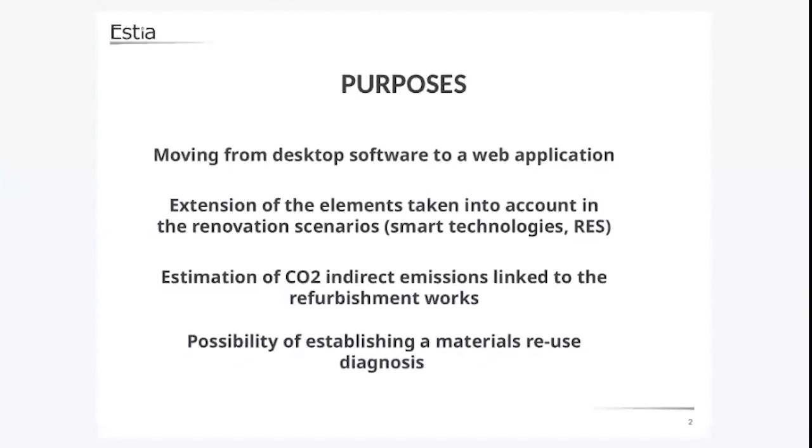As part of the PRELUDE project, the EPIQR desktop tool moved to a web platform, allowing anyone to easily diagnose a building renovation with reliable costs from anywhere. Also through the PRELUDE project, new elements with their relative costs have been added to the method to take into account smart technologies, energy optimization actions, and renewable energy sources. Finally, to help the residential building stock fit CO2 reduction targets, the new version also includes the CO2 indirect emissions of each refurbishment action.

This EPIQR Eco method will, after finishing its implementation, also be able to take into account reuse materials scenarios.

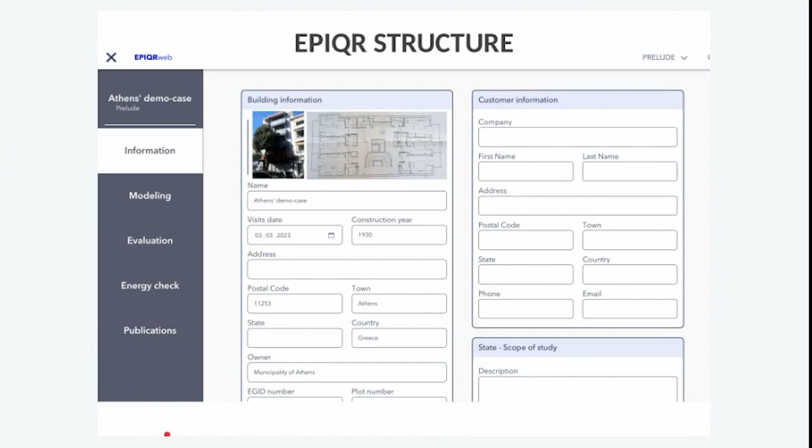The first step of a building diagnosis is the completion of building information in the first tab. Contact details for both the building and the owner can be filled in, as well as visual building information like pictures or plans, as we can see in this capture.

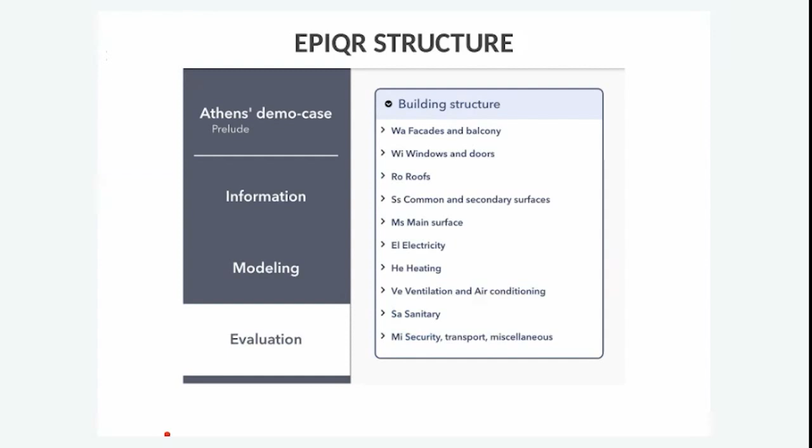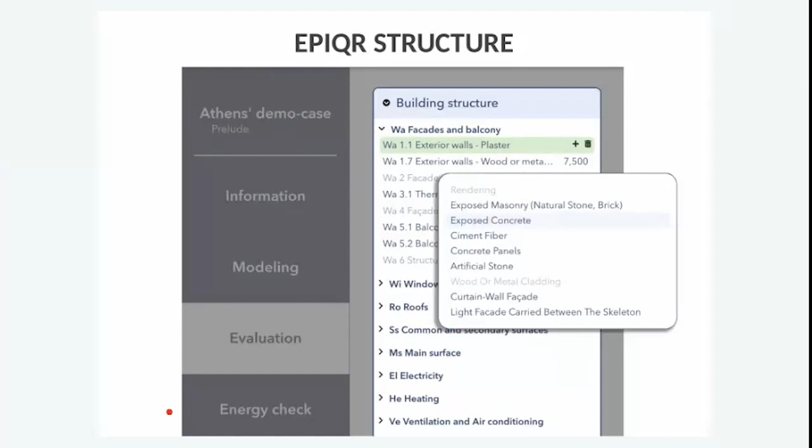In the evaluation tab, the whole EPIQR structure and coding principle defined by the method is summarized. The building is first decomposed into 10 macro elements, which are either architectural, for the first ones, or technical, for the last ones. Then, by clicking on a specific macro element, here the facade and balcony, its component parts or elements appear. The plus sign adds the item to the diagnosis, and the light color elements have not been added yet. For example, the facade decorations is not being diagnosed for now, with no cost associated.

Similarly, by clicking on a specific element within a macro element, its component parts or types appear. So here, for the exterior walls in plaster, we can have different renderings listed. Each element type can be diagnosed through the selection of two criteria.

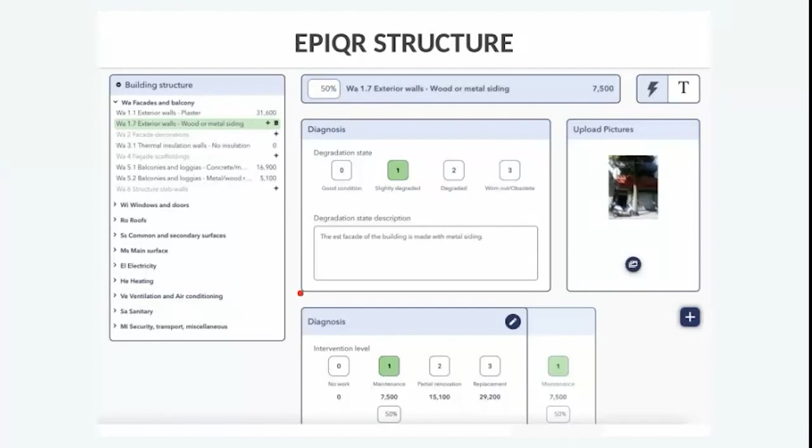The first criterion is the degradation degree, and the second is the intervention level. The degradation degree qualifies the element's current state, and pictures can be added on the right to remember it. The intervention level qualifies the work to be done to this element, ranging from 0 for no work to 3 for complete replacement. We can also add a ratio to each element to adapt them to the project reality—for example, if you have different types of facades, you would add each of them here. Then, by clicking on the cost below, the selected intervention level shows a cost breakdown with work details.

The unitary cost of the relative quantity here are detailed and help to understand which specific interventions are taken into account in the total costs. So the total cost here, it's the 8,000. And if needed, again, a ratio can also be applied to the total cost. So the ratio that we see here, the 50%, can be changed.

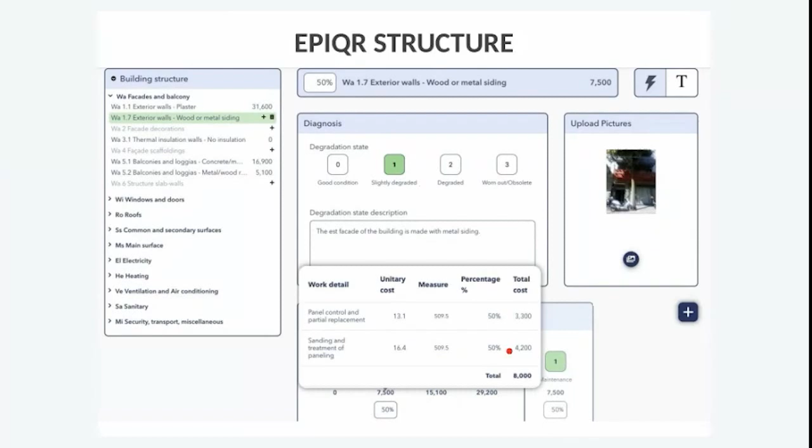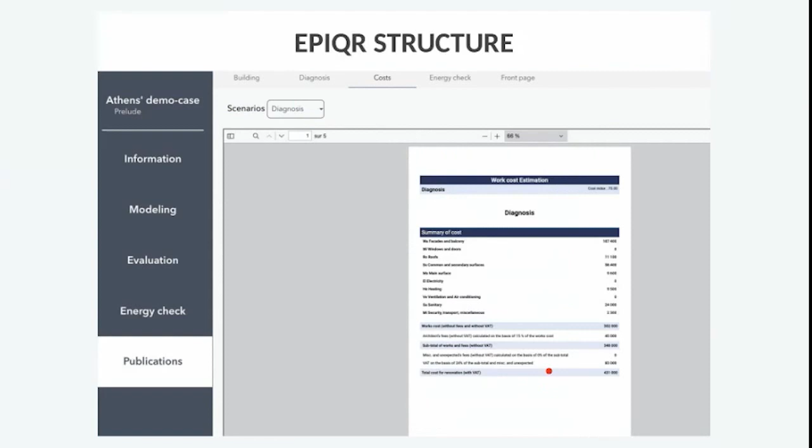And several renovation scenarios can also be added by clicking here on the right corner of the intervention level tab. And also for some element type, improvement or adaptation work can also be selected. Here, for example, you have the possibility to transform the facade into a ventilated one and adapt the cost of it.

And then in the last tab, the publications one, you have the result for each cost scenario and for the overall diagnosis that are available in the form of reports. And still within the PRELUDE project, about 10 smart technologies or optimization actions with their relative cost have been added to the database. Most of these new elements are located in the technical macro elements, such as here you can see electricity, or just below the heating one.

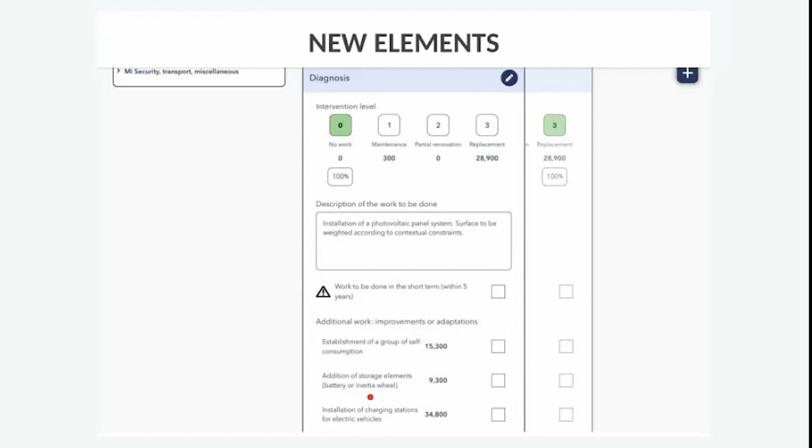To list a few, the addition of a storage element that you can see here with its relative costs, like a battery, or the installation of charging stations for electric vehicles, can now be linked to the photovoltaic installation and added to the total cost of the diagnosis. And similarly, optimization energy contracts, as well as the installation of energy meters, are now available in the database.

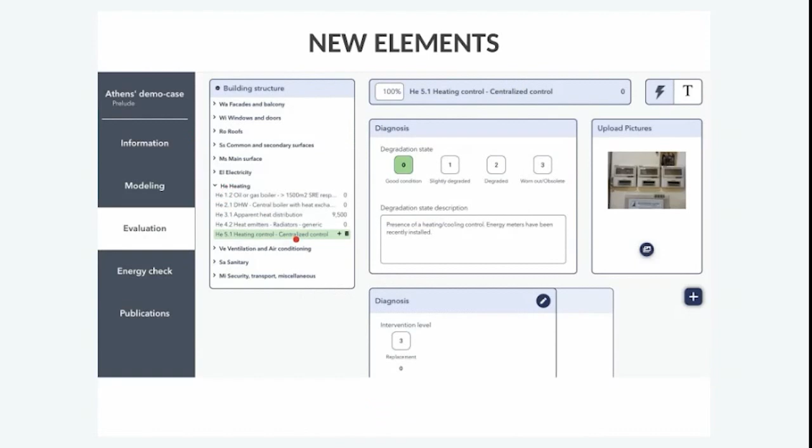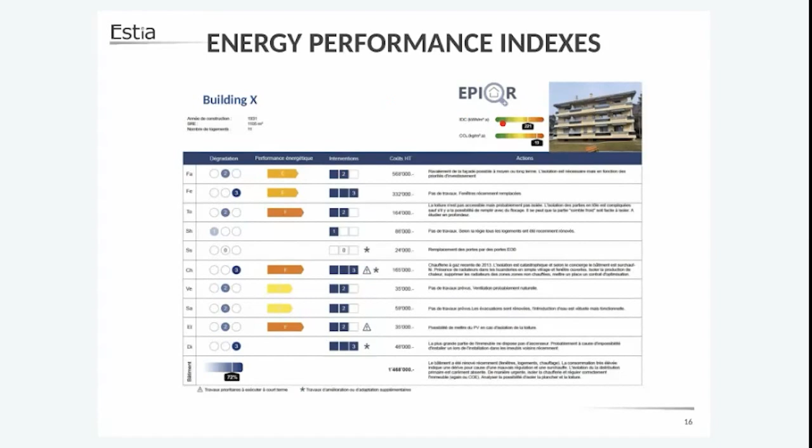So here it is for the heating macro, where you can see that you can add implementation of energy optimization contracts, etc. In addition to costs, several energy performance parameters can be entered into the platform, such as the energy efficiency class of each macro element that we can see here, in different colors and length, depending on the quality of the element. Or, for example, the heat consumption index, which here comes from the actual building consumption.

The latest software update, but not the least, is the calculation of the indirect CO2 emissions of each renovation work, named EPIQR plus CO2. So these results are derived directly from the diagnosis coding. No extra time is needed, and they are presented in the same form as cost results. So here we can see this is the actual state of the building. And for the first scenario of renovation, you have the cost and below the CO2 indirect emission of each intervention. This is the second scenario here.

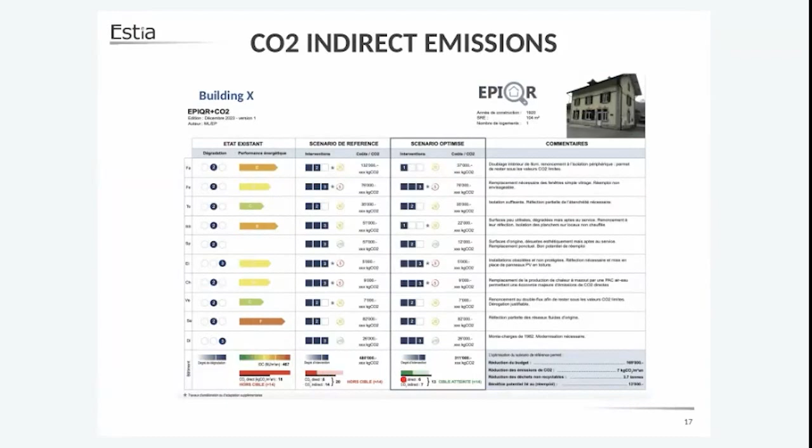And they permit to compare different renovation scenarios between them with another criteria, so not only the cost. And they also permit to compare them with the energetic standards of the country. So the energetic standards values are at the end here, and you can see if we are on the green side or the red side of this standard. The calculation of the direct CO2 emissions of a specific renovation is actually under development on this platform, as well as the version for all building affectations. For now, it is only for houses, I would say.

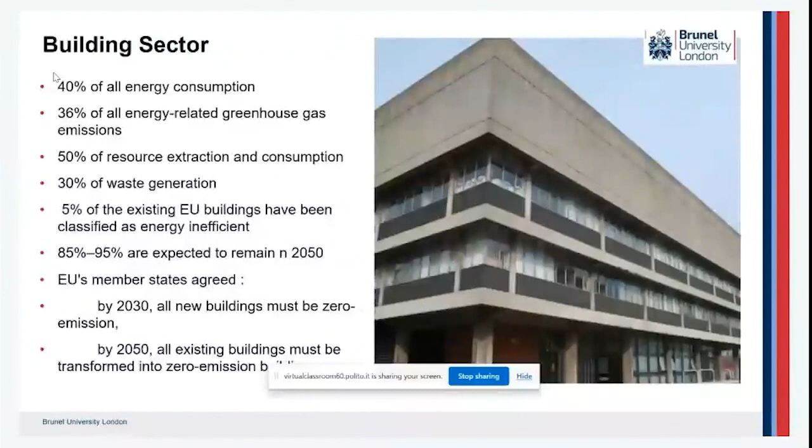As a result of that, the European Union member states agreed that by 2030, all new buildings must be zero emission buildings, and by 2050, all existing buildings must be transformed into zero emission buildings. So one of the ways of improving the environmental impact of the buildings is to retrofit the buildings.

For that reason, there are lots of different measures that have been taken to reduce the environmental impact of the buildings. We are familiar with, for instance, improving the insulation, the ceiling, the roofs and floors of the buildings, to reduce the heat transfer and loss of heat in the buildings, and also different types of sealing of the gaps and cracks. Installation of green roofs and walls is also something that has been considered.

Replacement of the windows and doors with more efficient ones. Using energy efficient lighting, for instance, replacing the bulbs with energy efficient LEDs, or installing sensors to control the lighting system during occupancy. Another thing is upgrading the HVAC system, the ventilation and air conditioning system, making them much more highly efficient,

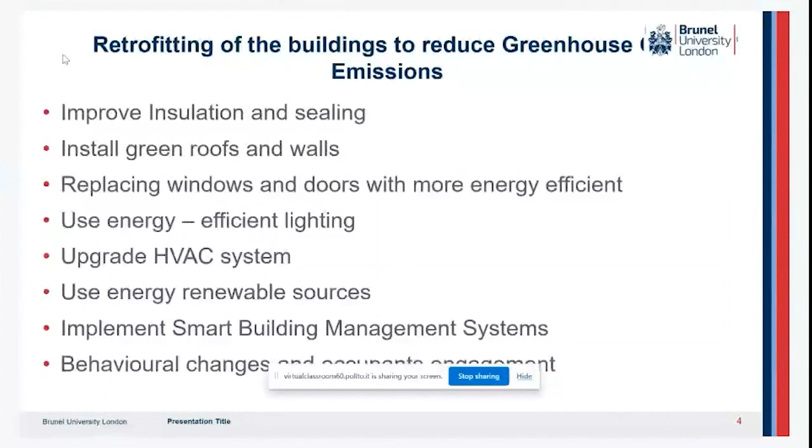But retrofitting of the buildings is not always easy to implement, and very often we are facing different types of issues, and those issues could be related, for instance, to cost considerations. The retrofitting could be expensive, and there is also some hesitation by the owners about investing in these energy inefficient buildings. And also the costs that are involved, for instance, the cost of the materials, could cause lots of issues.

Another thing is technical challenges, especially if we have older buildings. That's also something that needs to be considered, because not all buildings, new or old, are the same. They need different types of approach. There could be some regulatory barriers as well when it comes to implementing retrofitting measures and energy efficient technologies.

And that also depends on the place where the buildings are based. Even different countries in the European Union have different approaches to how they're dealing with improvement of the energy efficiency of the buildings. There could also be a lack of incentives. Some regions have more financial incentives, some regions have less, or some countries have more or less.

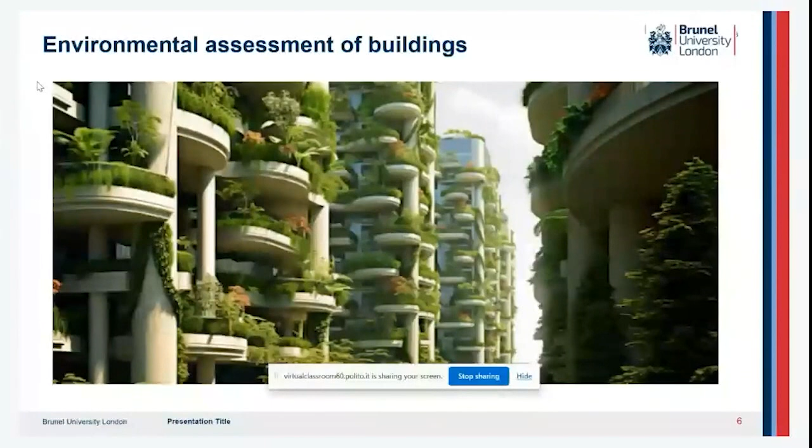When we talk about environmental assessment of the buildings, I would like to introduce a life cycle assessment framework, which involves three different stages: goal and scope definition, inventory analysis, and impact assessment. This is a standard life cycle assessment that could be used for industrial processes, for assessing the environmental impact of different products and processes, but it also applies to buildings.

For instance, if we use life cycle assessment to compare before and after retrofitting, how sustainable they are, we need to set that up at the very beginning. Or we can maybe make some comparison between buildings. That's also set up in the goal and scope definition. And also functional units, which are very important in terms of buildings, and must be set up at the very beginning.

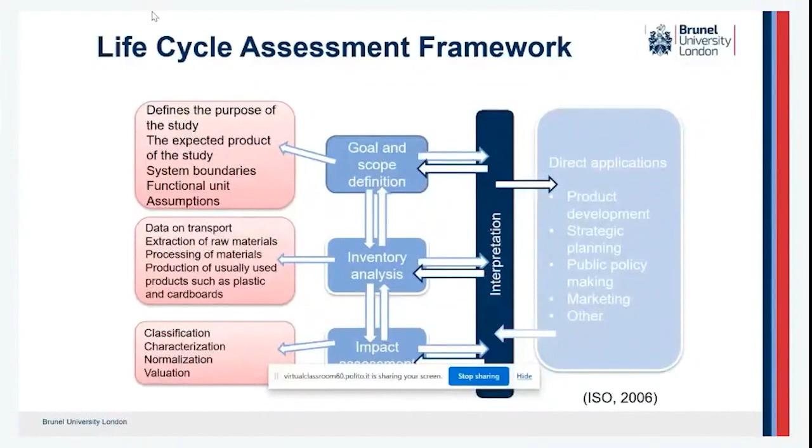So to how many buildings can we apply all these system boundaries including end of life? Probably few of them, because old buildings are normally retrofitted or improved, and we are focusing more on assessing the environmental impact of live buildings, the buildings that are in use.

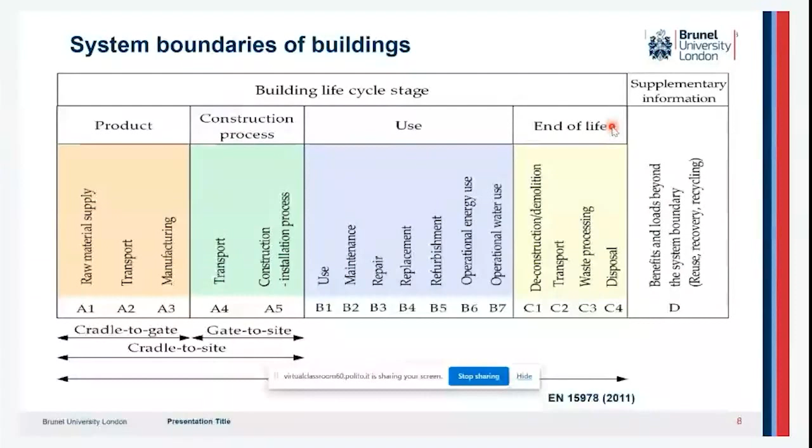In terms of the system boundaries of buildings, we mentioned the collection of the data, which is part of the inventory analysis that we mentioned in the previous slide. After that, we are thinking about how to use the data, how to analyze it in order to do the environmental assessment.

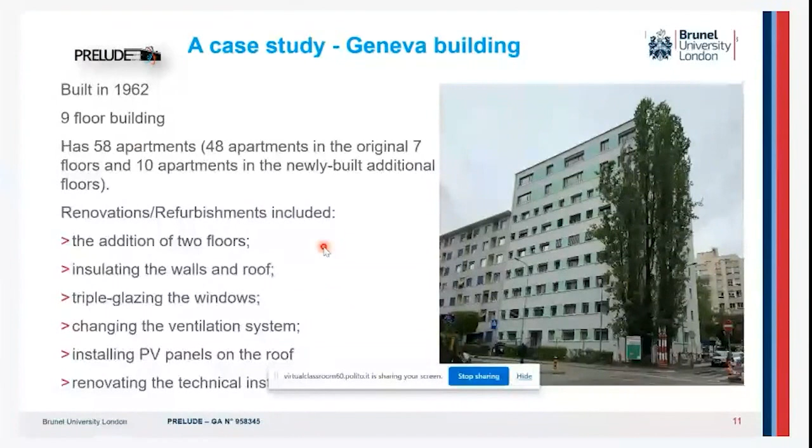So we were using life cycle assessment for this building, and the first thing was the goal and scope of the study. The goal of the study was to carry out a life cycle assessment on this building and estimate the environmental impact based on the energy consumption of heating and domestic hot water before and after the renovation.

The scope of this study was to specify a functional unit, for which we took into account the amount of energy that has been used, and energy sources, input energy and output energy. For input energy, we took into account the sources of the energy in the before and after scenarios.

As a part of the refurbishment process, a total of 150 sensors were placed in the building, primarily in the last 2 floors, monitoring the temperature, pressure, electric consumption, electric flow, status of the gas burner, heat pump, and gas counter. These 10 sensors were placed in the apartments in the last 2 floors, one in each apartment, monitoring the energy consumption.

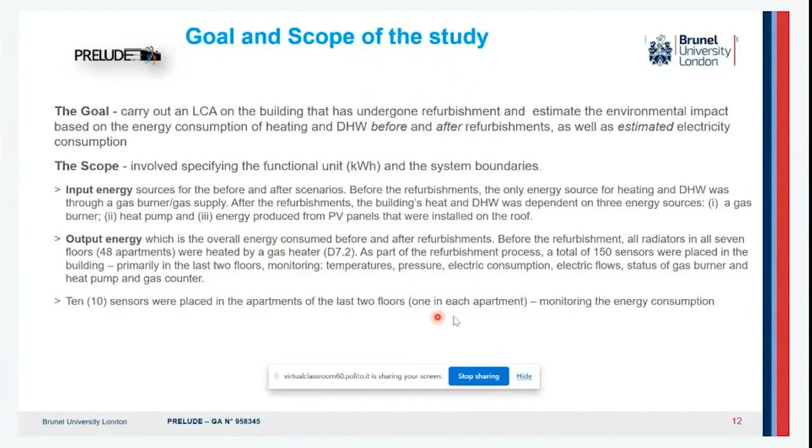And we can see now the system boundaries of the building before and after refurbishment. I would like to emphasize that we considered the life cycle assessment on the usage phase of the building, because the building is used, and we can see the system boundaries before refurbishment, what kind of energy sources have been taken into account, and after refurbishment, the usage phase before and after the renovation of the building.

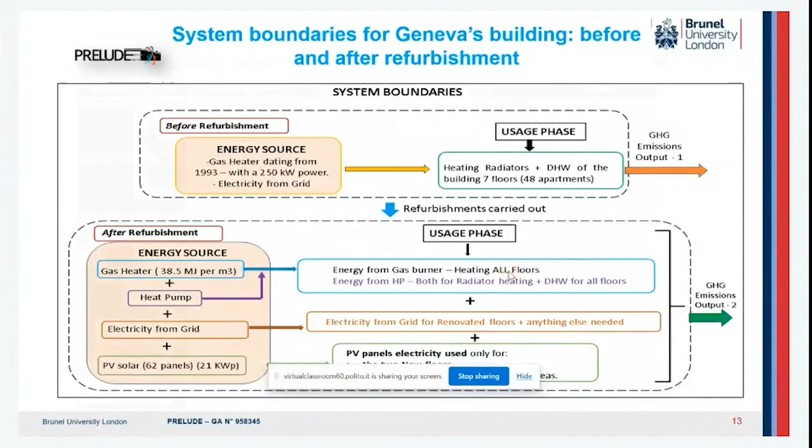And a number of data and also the historic data have been received from the partners. This is something which comes from the PRELUDE partner, and we considered before refurbishment.

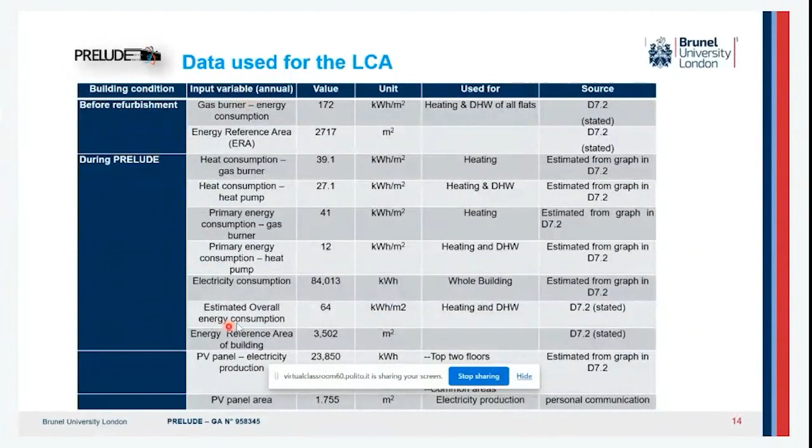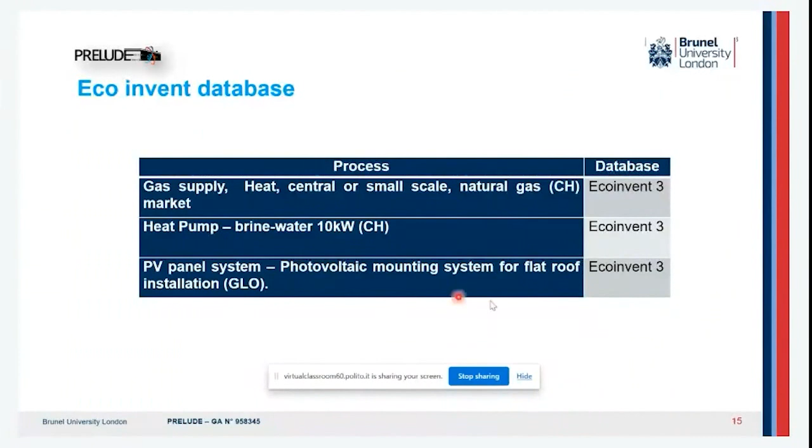You can see the values that we considered, and you can see all these input variables that I have already mentioned: value of the buildings, unit, and for what they were using. And also the EcoInvent database has been used. We were using EcoInvent 3, we were using SimaPro, and we considered this for the gas supply, central heat or small scale natural gas, heat pump, and PV panel system. We have been using the database from EcoInvent 3.

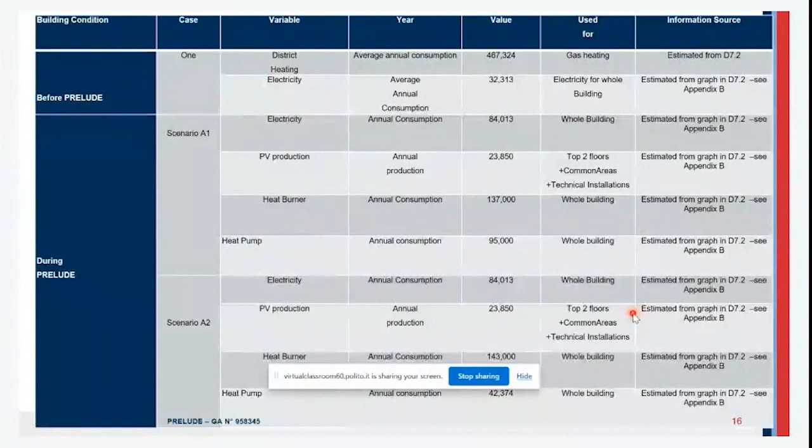And in the next slide, we can see more data like variables before PRELUDE and during PRELUDE or after the PRELUDE project. And again, we had 3 different scenarios which came before PRELUDE and during PRELUDE. Annual production of the power for each renewable system is given in this table. So we were more focused on the retrofitting of the building, but taking into account the use of the renewable energy.

So we can see some of the data about characterization results of this building. This data comes from SimaPro simulation, and we can see there are 13 categories that have been taken into account, and you can see all of them. I hope you can see it here, there is one part which says before refurbishment, scenario A1 and A2.

And there was a difference found between before and after refurbishment of the building, and the largest reduction of global warming and ozone formation, and also fossil fuel resources, was seen at scenario A2. It was also interesting to see that the impact of ecotoxicity categories from 7 to 12 was greater after refurbishment conditions. And this is probably related with the utilization of the PV panels and also the heat pumps.

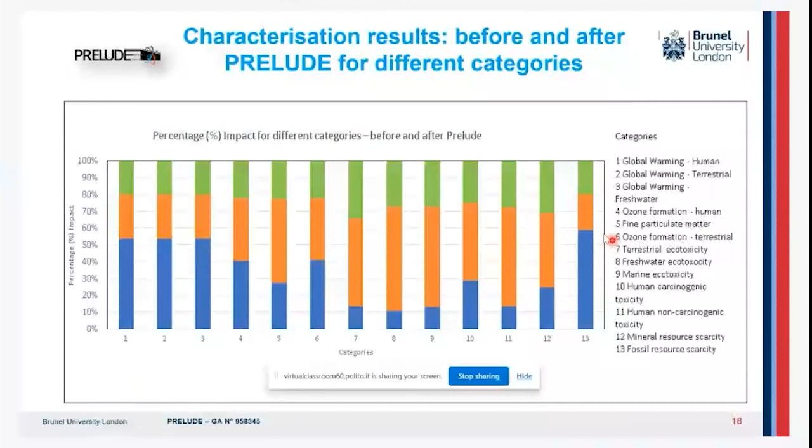The next slide shows the damage assessment. This was similar to the figure shown before. 3 aspects were considered: human health, ecosystem, and resources. And it was interesting to see the reduced damage impact of the 2 refurbishment scenarios; before and after there was some difference, but scenario A2 gave much more promising results with a reduced impact in all categories.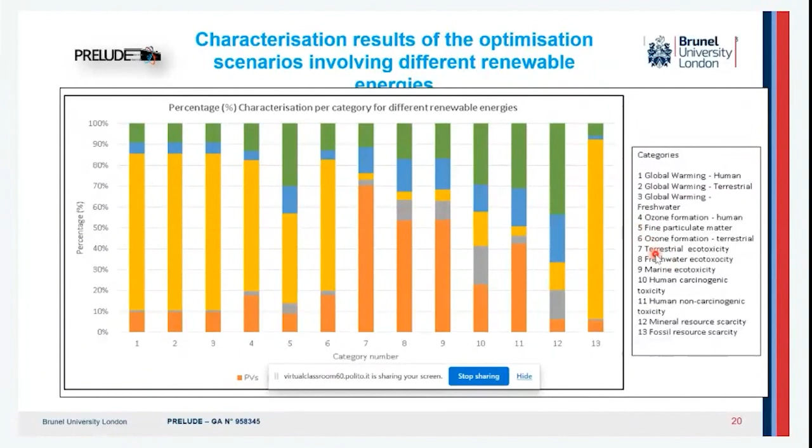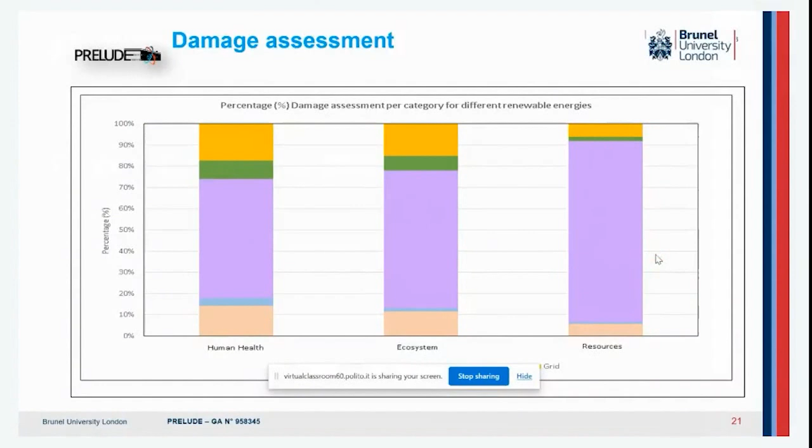And again, we have the damage assessment, which shows the percentage of three main areas, human health, ecosystem, and resources, of different renewable energies, specifically photovoltaic, wind turbines, combined heat and power, and also heat pumps, relative to electricity from the grid. What we got from those results is that in all three main areas, combined heat and power was associated with the higher impact. And the lowest impact in the three areas was from the wind turbines, followed by HP.

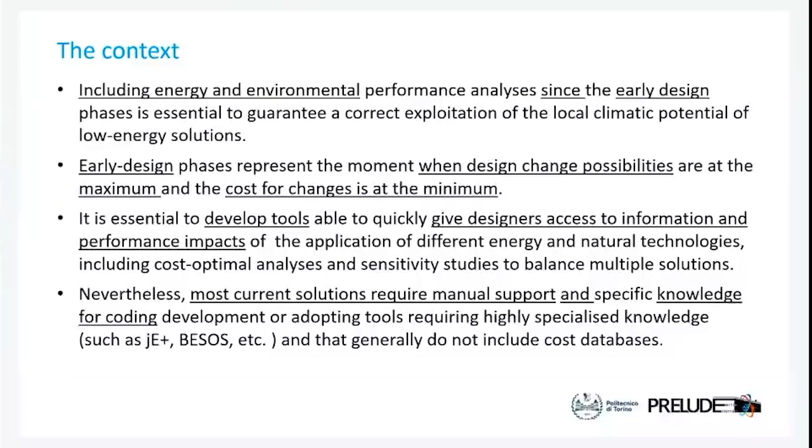So the objective of this presentation is to show a new methodology for cost-optimal analysis in buildings, based on an innovative Python-based EnergyPlus interface, PREDYCE, that we will see shortly, to support since early design or since intermediate phase of design the choice of the correct service for retrofitting.

And we will discuss this application using a real demo building, located in Turin, inside the demo of the PRELUDE project. We will see the structural presentation approach and methodology.

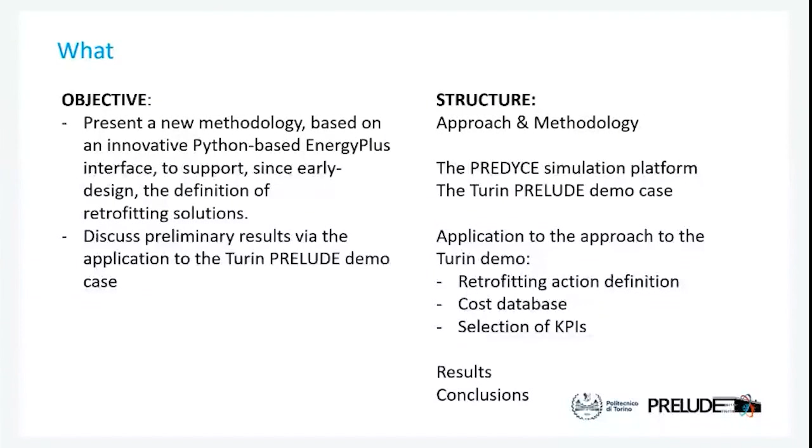After that we go inside what it is, the PREDYCE simulation platform. We will see what is the domain of this PRELUDE Turin demo case, and after that we see the application for retrofitting action definition, cost databases, and selection of key performance indicators that we will use. That's clearly how open and will be defined - at least the retrofitting action and selection of KPIs by the end user - inside a very large list and database of potential actions pre-built in the code. We will see the results, and after that we have some conclusions.

Broadly speaking, and before giving the floor to engineer Francesca Fasano, who will show you the platform in depth, we will only remind, broadly speaking, which are the general approaches.

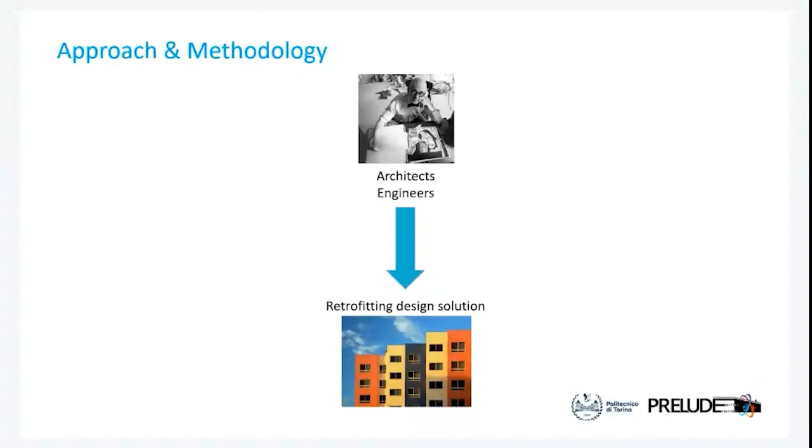Now, an architect or engineer is asked to do a retrofitting solution for a building, and will develop this design solution. Broadly speaking, they generally do a building inspection, more or less following a protocol, and after that define clearly the boundary conditions: what action can be done according to local regulation, what needs to be done according to national or European regulation, what can be done in terms of cost, because that's clearly also a domain, and what could be the application in the specific constraints.

But broadly speaking, in general, this closed and implicit design approach clearly leaves open the fact of whether we are really selecting the best solution, or the solution that perfectly works - I don't know - in this typical climate, in this local microclimate conditions, or why not, one that will be resilient to climate change in the future. So that clearly supports the fact that we may need alternative visions that help the development of the final design choice.

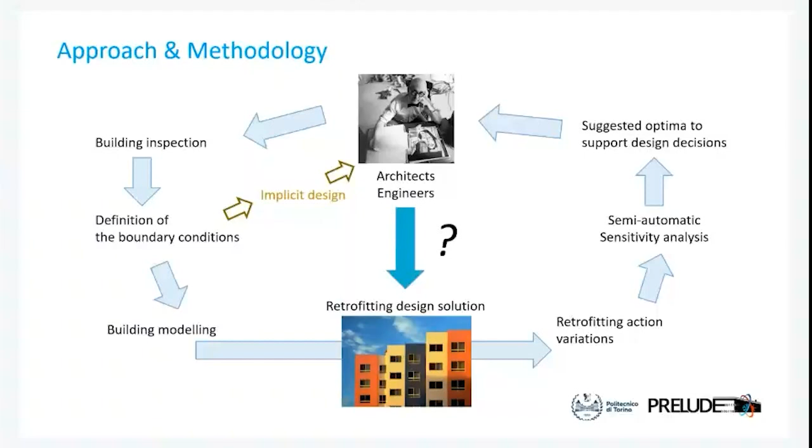It's done by the designer, it's done by the company that supports these things, but through the adoption of a more coherent and performance-driven vision. They use building modeling, retrofitting action variations, and semi-automatic sensitivity analysis to support and potentially analyze the impact of different technologies on the field.

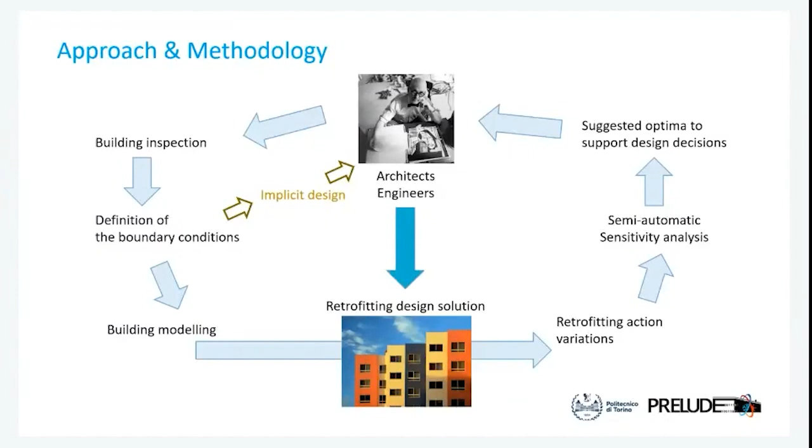The clearly suggested optima can support the design solution, or at least give an idea on energy, thermal comfort, and cost, which would guide the direction taken by specific choices in the building design.

Now we start looking into a specific case study we worked on recently. However, the methodology we followed is independent of the demo case and usually comprehends these steps: first, modeling the building demo case, then calibrating it to align with its real behavior, especially concerning the free-running indoor temperature. Then we define the boundary conditions of the model, such as occupancy, other set points and schedules, the retrofit parametric actions, and the key performance indicators. Finally, we can perform the parametric analysis and manage the results.

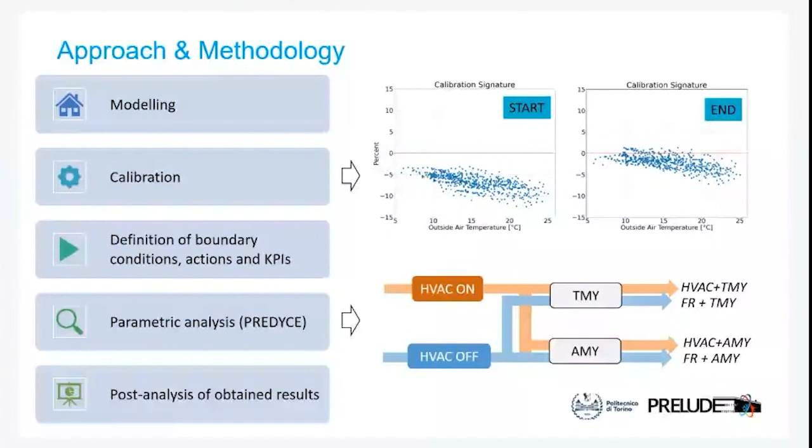PREDYCE is a building simulation supporting platform, funded under two European projects, E-DYCE and PRELUDE. I already introduced it to you about a month ago, so briefly now: it is coded in Python and structured in independent modules, whose main purposes are: first, allowing automatic editing of building models in IDF format; then computing several KPIs, both climate and building related.

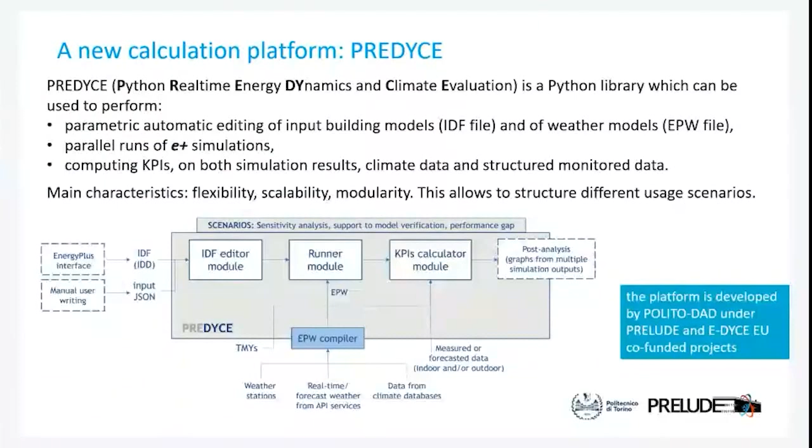Then, performing parallel EnergyPlus simulations, and finally also generating weather files from data coming from different sources. The combination of these modules allows the definition of several usage scenarios, which allow us to simplify and also test several methodologies and processes. For example, here we are doing building and climate parametric analysis, which can eventually be coupled with optimization algorithms. We also use the calibration support module, which supports the building verification process in a more automatic way than usual.

Here you can see an example of PREDYCE aggregate output. As you can see, it is very similar to the output you get from BESOS, if you've already used it for the laboratories, with the simulation reference index on the rows, then a first set of columns identifying the variable parameters, and another set of columns with the KPIs.

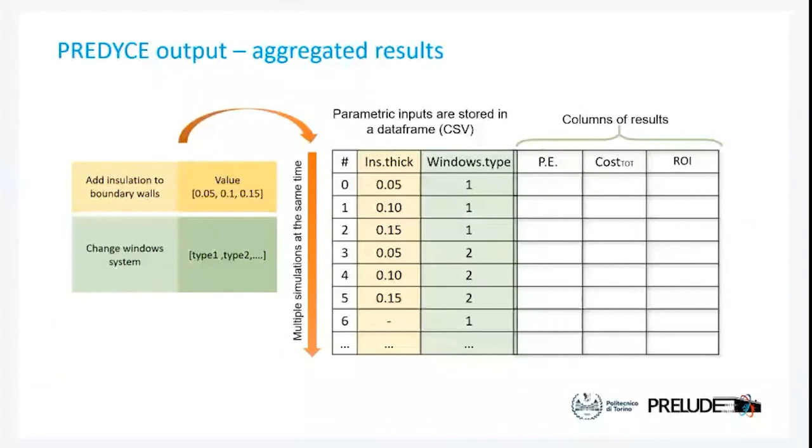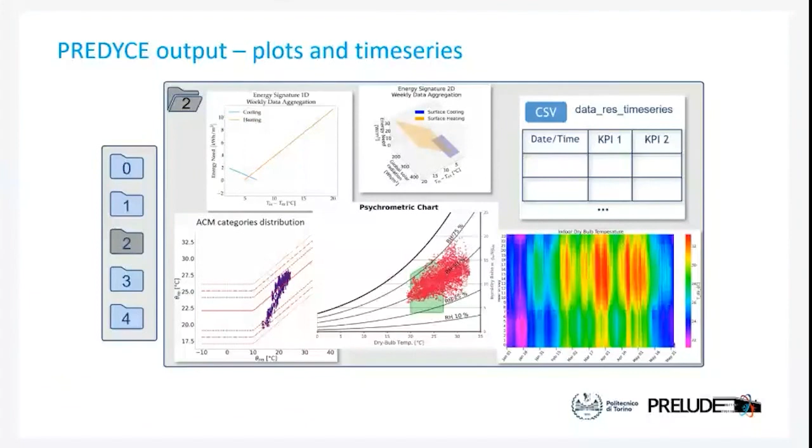Moreover, PREDYCE allows, for each simulation, retrieving time series KPIs with the desired time step and generating plots. For example, you can see 1D and 2D energy signatures, adaptive comfort model point distributions, an example of a carpet plot which could be generated with several variables in input, and also the carrier plot.

Now we start looking into today's application. The demo case is a multi-story residential building located here in Turin, which features characteristics in line with most buildings constructed during the 60s and 70s. It has never undergone a renovation process, except for measures taken by single tenants, so not in a uniform way, for example substituting windows in some apartments or installing some cooling split units.

The building has a north-south orientation with mainly living areas on the south and bedrooms on the north. In this building, 8 of 27 apartments are monitored under the PRELUDE project, and these have allowed us to calibrate the model.

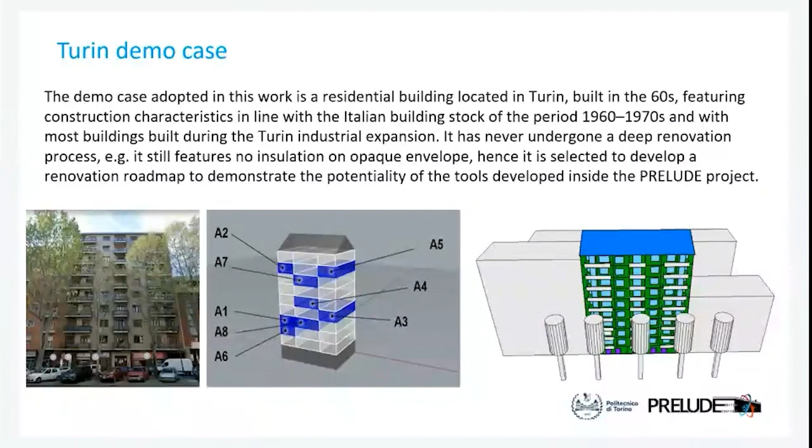Here you can see the list of retrofit actions chosen for this demo case and how they can be translated into an input JSON file for the PREDYCE platform. The considered actions include adding an insulation layer to boundary walls and the roof floor, substituting the window system, adding automated shading to the south-oriented facade, changing the lights both in the apartments and common circulation areas, upgrading the heating system, and systematically installing a cooling system in all the apartments.

And finally, the addition of decentralized mechanical ventilation units, which could allow indoor air quality improvement and heating savings in winter, and lastly also adding ventilative cooling in summer via the bypass of the heat recovery of these machines.

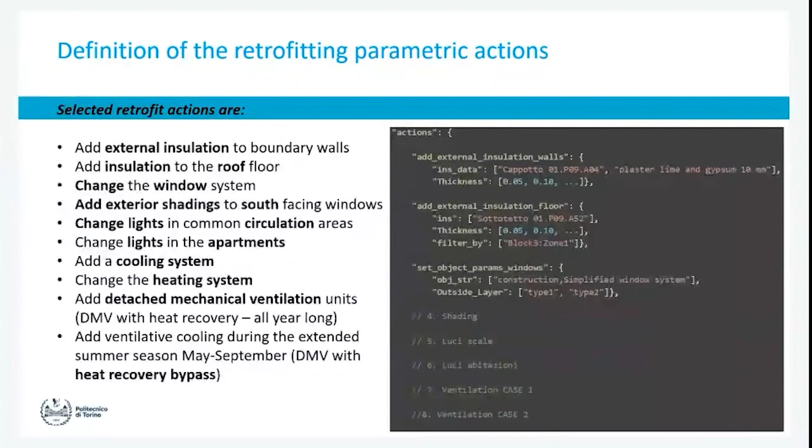Here are listed all the KPIs defined to evaluate the performance of the different retrofit solutions. Among them, some are aggregated yearly values and others are time series or plots, which allow us to determine the meaning and behavior of specific simulations. KPIs allow evaluation of three main performance aspects: consumption of heating, cooling, lighting, and mechanical ventilation units; costs; and thermal comfort. KPIs related to cost are dependent on the selected demo case, and hence need to be used accordingly.

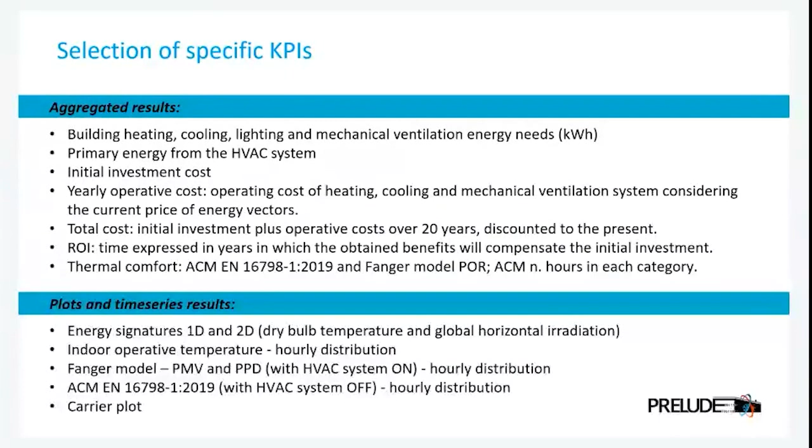Also, to reduce the number of simulations, the change in the heating and cooling COP, so performance coefficients, is evaluated as a post-analysis. This way the number of simulations could be drastically reduced.

The first step is to develop the cost database. This doesn't need to be developed each time for each building, but costs are generally referring to the local area in which we work, so member states in Europe, or a specific region, which may require adapting some costs according to the specific place where we do the building analysis.

In this specific case, thanks to the work of Dr. Davide Meccacici, we defined a cost database set for the Piedmont region. The majority of the data comes from the regional price list of materials and installation, including the number of people putting on the specific material with different levels of insulation thickness. It's not only a parametric cost of the insulation, but also a change in the cost of installation, because up to a certain amount is one cost, and above that it means a different fixing point and more time of working.

Plus the maintenance cost over a 20-year lifespan that may change according to the type of building, considering we don't do other larger retrofitting in this period. Some costs may not be found in the original price databases and need to be developed by market estimation, meaning calling different companies and making an average of what we get, like for example for the detached mechanical ventilation unit.

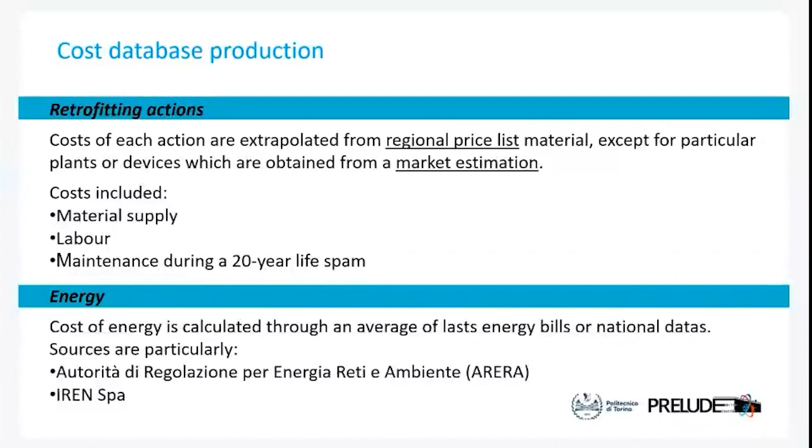The cost of energy is supported by an average of the last energy bills from national databases. We rely on the national authority for energy and cost, and also consulted IREN SpA which is part of the project, part of the hearing companies in this sense. Thanks to that, we're able to analyze and post-elaborate the KPIs that we are interested in.

So we look at the total primary energy, not only the final energy for natural gas if we have a specific heating system, or if we change it to electricity, trying to analyze and envisage what may happen in Europe in 2050 with the exchange of natural gas for electricity. We also convert this final energy use, with the specific cost split, to a primary energy factor, to have an idea closer to what you might see in an energy label, in terms of type of output.

So according to the energy needs by final use, we have a cost - the cost of gas, the cost of electricity, the cost of the energy fuel that we expect to use for the single year, and then we actualize it with the discount rate, which in this case we set to 3.5 based on a concept looking at what arrives in the market.

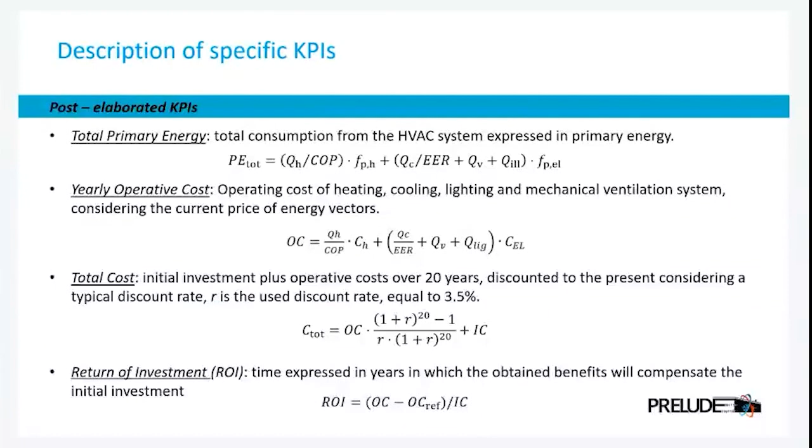Thanks to that, we're able to calculate also the total cost and the return on investment. On this point, we support this simulation with a sensitivity analysis for all of these actions that may vary more or less.

In this case, we select a more diffused one, also looking with the panel involved in this Turin demo case. And we analyze the system working with HVAC on, so in mechanical mode, and in the free-running mode, especially to analyze the differences, especially for summer in this case, for what arises with and without the mechanical cooling, for example. And in this case, clearly we check the HVAC and free-running under the typical meteorological year, which is the typical climate of the region.

This is exactly what we, for example, develop in some cases of exercise to support the choice of the best design solution. But also we analyze one case of the same building under an actual meteorological year. So a true monitored weather in Turin, thanks to our cloud-connected meteo station, to support and check what will be the resilience of these choices under heat waves.

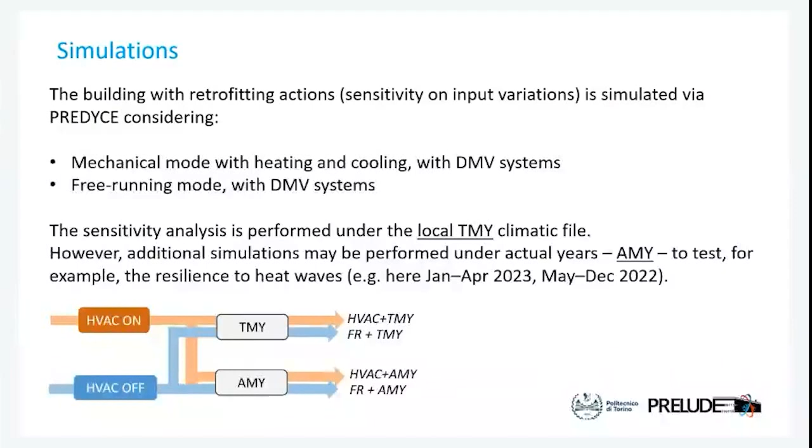I don't know if you know, but clearly in the past year, and also this year, in Italy at least, we are experiencing quite long heat waves. So very hot summer periods. And this supports the possibility to test how the choices under the typical climate will react, for example, if we would be experiencing heat waves or more critical climate conditions, like maybe in the future, for climate resilience.

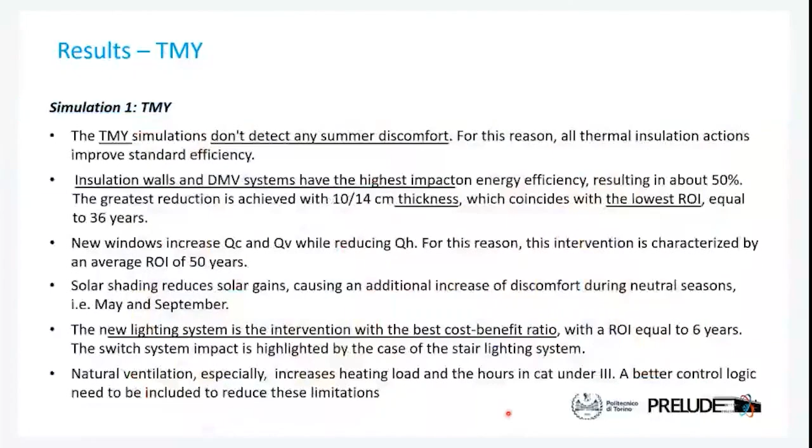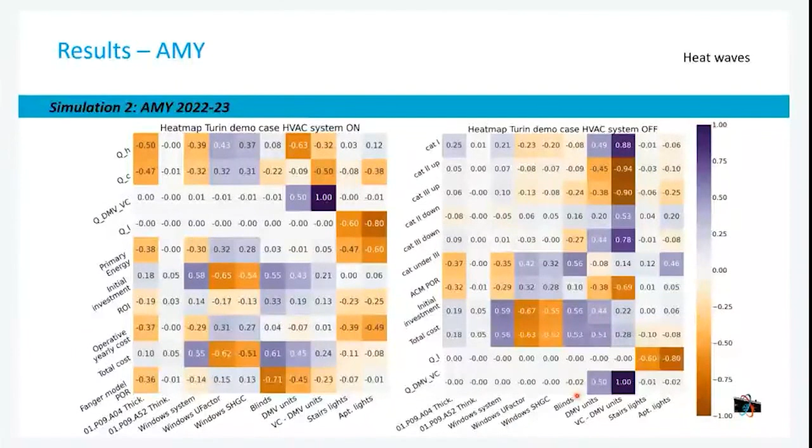And it is also evident that natural ventilation will work very well under a good control logic, but clearly when there is no control, and it's more manually operated like we have simulated, maybe it's not the best strategy for some of the cases. When we pass to the actual meteorological year here, we see, if we compare to the slide before, some changes. And these changes arrive mainly from the drastically higher temperatures in recent years, which have a strong impact on the result because we have summer discomfort.

Okay? And this clearly suggests that it's true that in a typical meteorological year we do not have so many summer needs, so we can adapt and optimize the building, but the trend suggests that for future years we may also need to take summer discomfort more into consideration, okay? Because in this case, in 2022-2023, we have more than 1,500 hours of discomfort in summer.

In addition to that, this supports the fact that the cost optimal we had before in insulation thickness, 10-14, is roughly speaking confirmed, but when we go higher than 14, we start to have problems in terms of summer load, okay? So, roughly speaking, the previous analysis is confirmed here, suggesting that potentially we can move to 12, in the middle of this cost optimal.

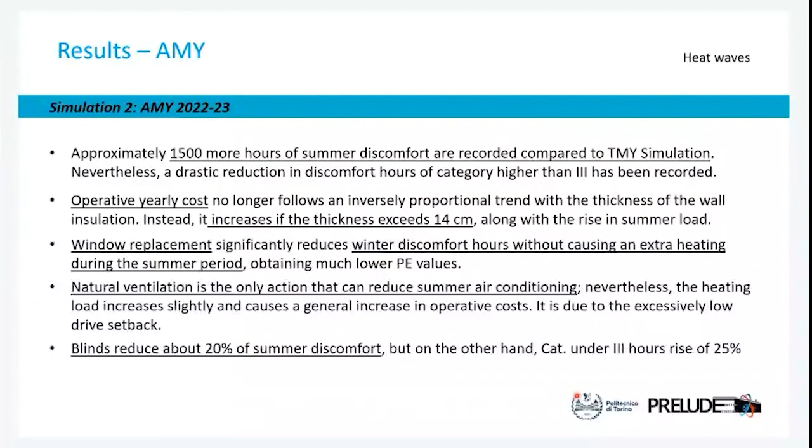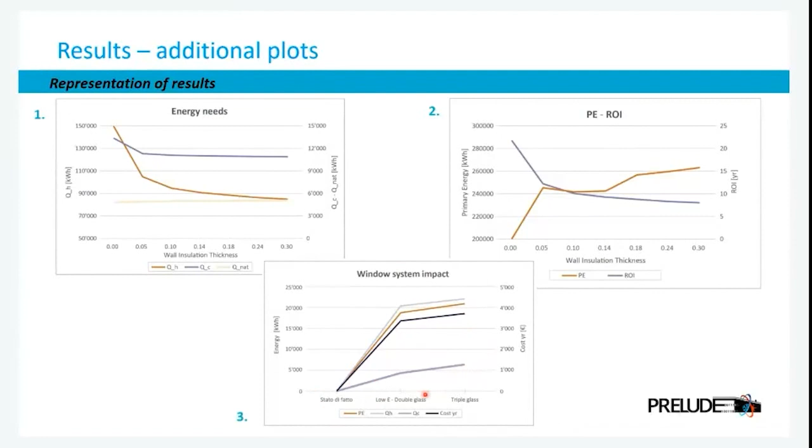You see that the total is slightly different, because this is final energy with respect to primary. Okay, so there is the factor applied in this case to the primary one. And in this case, we also see that the cost of cooling grows. So we demonstrate what we had, let's say, before.

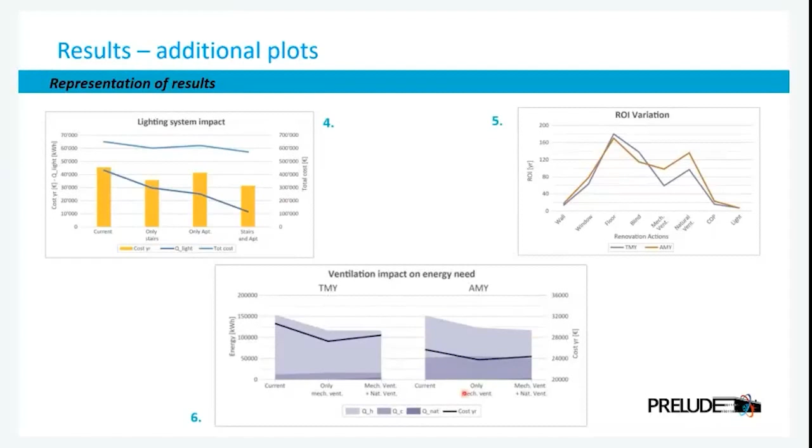And roughly speaking, here we have the difference between typical and actual meteorological year in terms of consumption with only mechanical ventilation, and the adoption of mechanical plus natural ventilation, which in reality is the support of ventilative cooling.

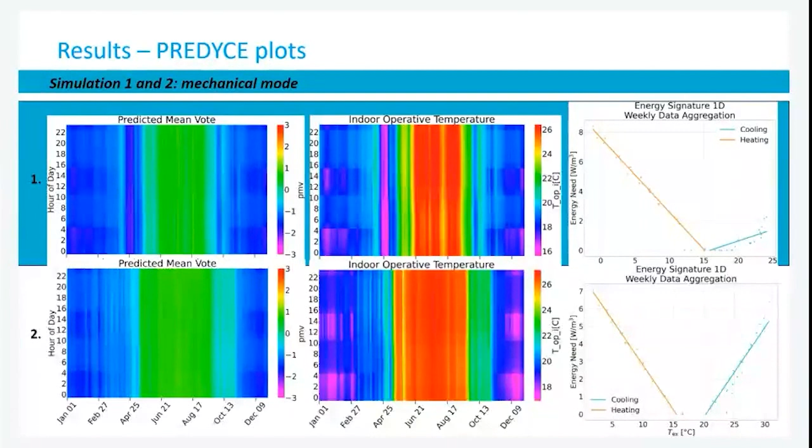Of course, cooling is a bit less, but for cooling, you know, we also have the solar radiation and the ventilation variation that is added, so that clearly may cause some changes. But it's clearly evident that we also move the outside temperature from 25 to 30, 32, etc., from the average point of view for weekly days.

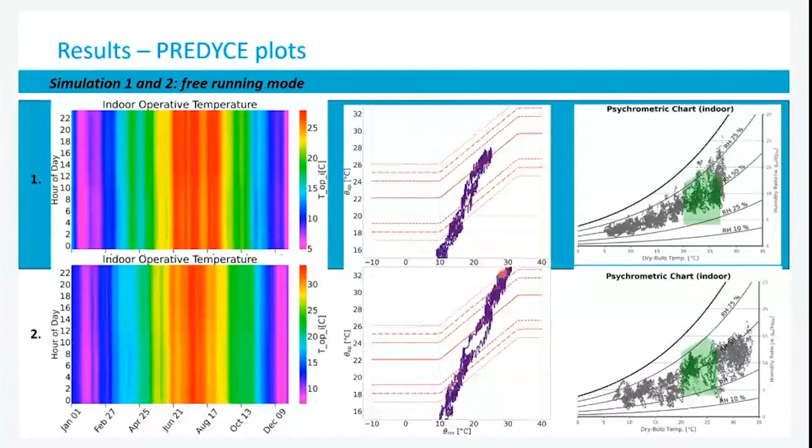And it's also evident that we have here a large number of hours within the comfort category in that thermal comfort mode, even category 1, always maintained, while with the climate heat waves, we go in some cases to category 3, okay, but maintained with the ventilation in this sort of comfort domain, which without it would spread out.

So, broadly speaking, to conclude and to check if we have questions, it is clear that this type of tool is needed, because how can we have this type of analysis without automatic or semi-automatic tools? It means that either you go with a basic tool to run thousands of simulations manually, or you use very simple tools that don't have the power to manage a large amount of simulations and potentially give you some optimization, some suggestion, but don't compare in heat maps or this type of graphs.

Then we also have the need and the possibility in this case to differentiate the key performance indicators according to the specific building, and also to have a very large number of actions that you generally don't see even in advanced commercial tools, like controlled shading, hourly control scheduling domains or set point domains for ventilation and so on, because this requires a dynamic simulation approach. In addition to that, clearly, it's very important that this type of platform is quite user-friendly.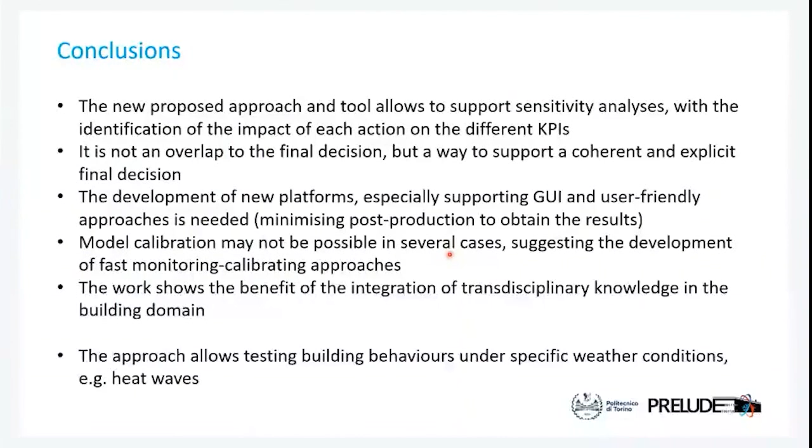So I think that now we can pass to the question and answer session. I will start with one to Valentina, about the starting point. Professor Stojceska, you clearly showed us the impact that European policy is pushing in the retrofitting domain. Roughly speaking, we expect to have net zero by 2030 for new buildings and 2050. That is 25 years from now, okay? But 5 years in the building domain is very small, because retrofitting means years of work, 3 years of building work. So it's quite near that we arrive at net zero energy as a requirement.

In this sense, what do you think would be the impact of these choices? How big will it be? Because if we think of the Italian sector, this means, I don't know, many trillions of euros of investment by private people to pass to net zero energy. I don't know what it is in the UK, but a reflection on that is very welcome. Also, how big is this potential transformation in terms of life cycle assessment? Why is it so important, and why is Europe pushing to look at the extended environmental domain right now?